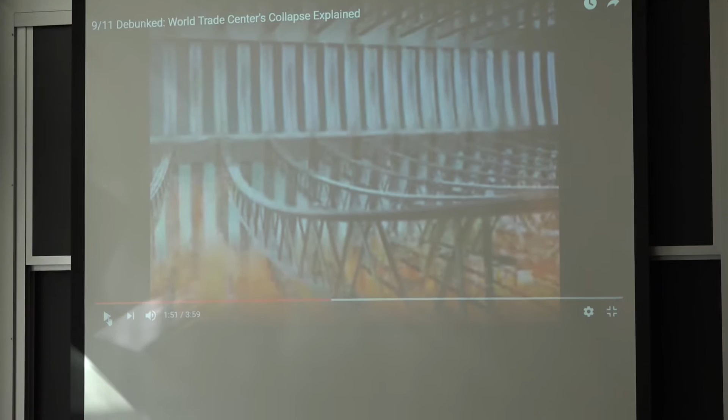So on 9/11, all the fuel from the plane was heating up these joists that made the floor. These are joists, they have concrete on them - we don't see the concrete, but you can see it bow. What happens is you have the two vertical columns on each side of the building, and then what used to be your floor - a joist with all the webbing you need for structural efficiency - became more like a rope with a lot of hanging weight pulling on each side.

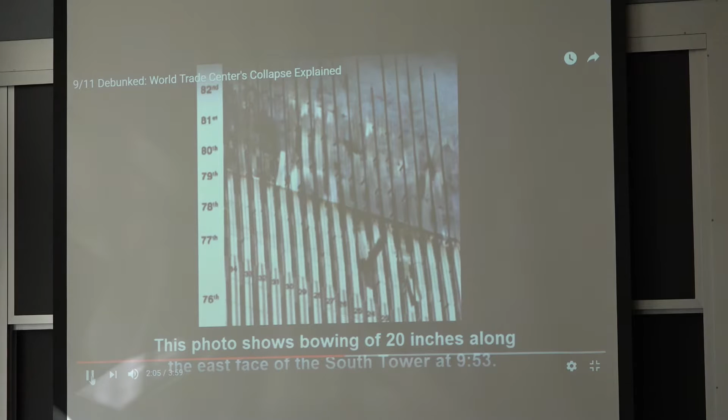So you can see over time it started to pull on the column, and there'll be a couple of images - this one I can't say we see super well, but let's keep going. You see it here: if you draw a straight line, you see there's at least one floor that caved in a lot before anything else happened. So when people come and say, well, the steel melted and became really soft, the true story is a little bit more specific.

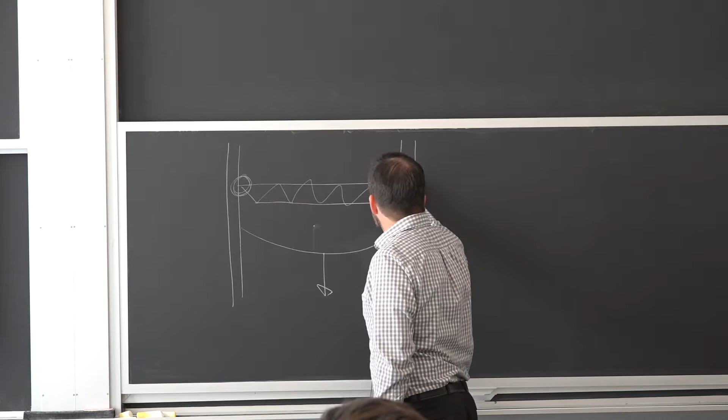There are so many ways that you could avoid this and delay by hours and hours, if not completely eliminate the collapse - if, for example, these connections just pull out and the floor goes down one floor. It's not great, but it's very different than the entire tower collapsing. So that was one alternative they thought of. The other alternative is, don't use structural steel there if you can avoid it - use a thin wall metal frame that can be subject to heat, or insulated.

So you have 2 or 3 options. And what it boils down to for a high-rise building like the Freedom Tower that replaced it is really thinking about what happened. If you have a lot of heat, it's going to happen again. We don't know when, but it will happen again. And there are ways around it that are practical.

It's engineering. It's not discovering a completely new physics or anything like that. It's not necessarily adding tremendous costs. It is forcing you to think, what am I going to do if this happened? The releasing of the joist, I believe, was really one of the things the engineer thought was a great idea, but there may be some other people that disagree, because then you need some more redundancy. You still need a frame to hold the building, and you have to insulate those in that case.

So the reason for using steel, and you'll see that with Professor Eagar, is the toughness. It is able to give before it breaks. So you need steel in that building, or some form of reinforcement, some form of toughness, so it doesn't all collapse if you have a seismic event. But that same steel, the softening of it and this pulling action is kind of what seems to be the consensus. That took a while, though. It took years for people to start agreeing and reviewing those images.

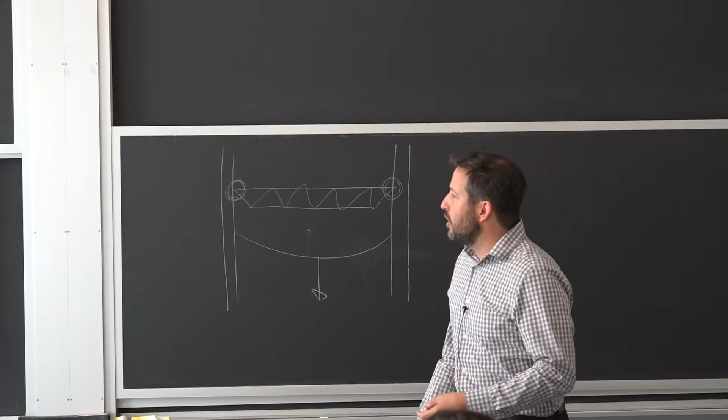So I cover a lot more failure analysis in the spring, but one aspect that I always bring up is look at everything you've got. You can go and think in your head, oh, I think this is what happened, or I think this is it, but the actual detailed photos here is what happened. So it caved in. How can you explain it? And to me, that does explain it.

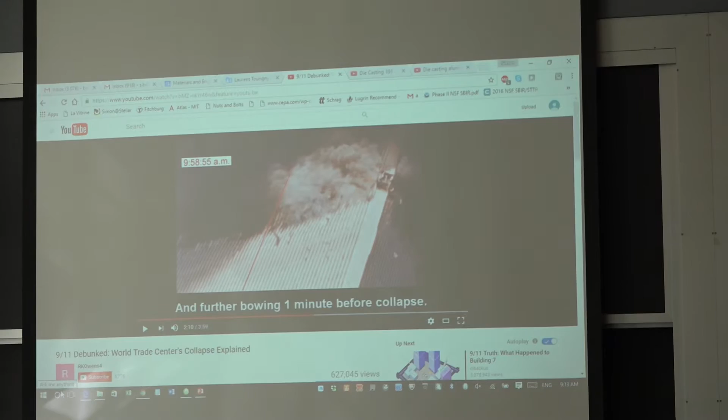So it is a big exercise. I think it's easy to do a failure analysis and miss something, to tell you the truth. So my only suggestion there, if you have a broken piece or anything that you're trying to know why it didn't work, is try to see all the information you have. And of course, there's some that's not going to help you, but you're supposed to be able to explain, whatever theory you got should be explaining those photos. Otherwise, you're still, I guess, on an earlier stage.

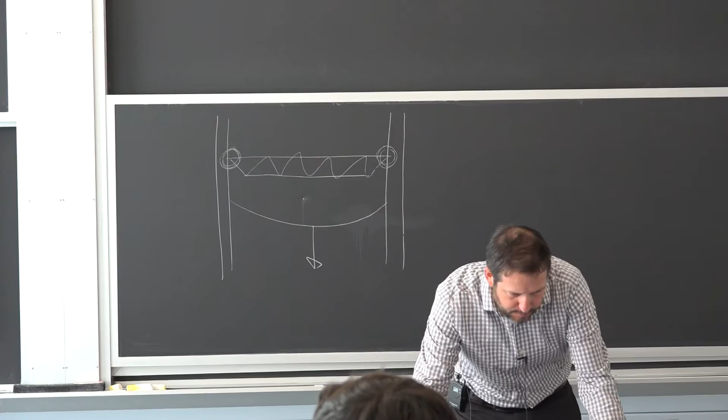So I hope it helps you when we go real fast through some examples and just point out, oh, here they forgot this, here they forgot that. There's just a lot of value in going backwards sometimes. Even any flooding, the event in Louisiana back a while ago, the flooding from Hurricane Katrina, there's just so much to learn on those levee, on the code, the safety requirements.

It's not the number, it's how you use it. If you say, I'm going to make this 30% stronger than it needs to, 30 sounds a little low. It's not a huge margin, but I guess it depends what you consider your worst case scenario, and then you can work from there.

There's something that I discussed also in the spring, in terms of just an airframe, the landing gear of an aircraft. If you talk to the aircraft engineer, he's going to tell you that he's got a 15% safety margin on that, as opposed to a factor of 2 that we design for a building. Traditionally, now there are new ways to design buildings that shave this down. But traditionally, it will look like you have more safety on the building, but it's because you don't do the same calculation.

If you design the landing gear, you do take the worst case scenario. You have all these readings from people landing in hard conditions, and you use that worst case load that you know about, and then you take your worst case material property that you know very, very well, because this material has been used thousands of times, exactly made the same way. And then when you combine the two, you can have a very small overlap, essentially a small spacing between strong enough, the demand and capacity, what we were talking about.

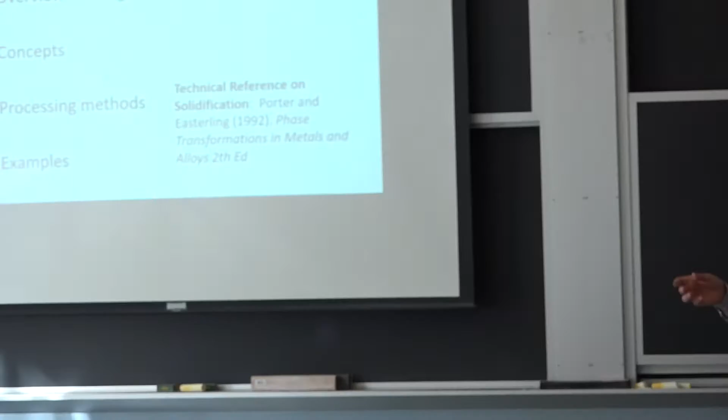And that ties in well with today, actually, because when you're at the point of making castings, a lot of the time you're starting to be in an optimization. And I'll qualify a few exceptions.

In course 3, we had a project for Tiffany, the jewelry people, where the platinum rings for engagement they make are relatively famous. One thing you don't want is these things to be loose or find out there was a problem with it if you paid top dollar. So for them, quality is very, very important. And they can make them very custom, and we'll go to exactly how to do that.

So that's one example where it's still a very small quantity—they can make unique rings through castings. But in general, for a structural application, let's say I got this chair, the first one I built, I'm not going to cast any components because that requires putting together a mold and a lot of processes. I'd rather just take raw material and assemble it together. So typically, if it's just a structural application, we are looking at high volume.

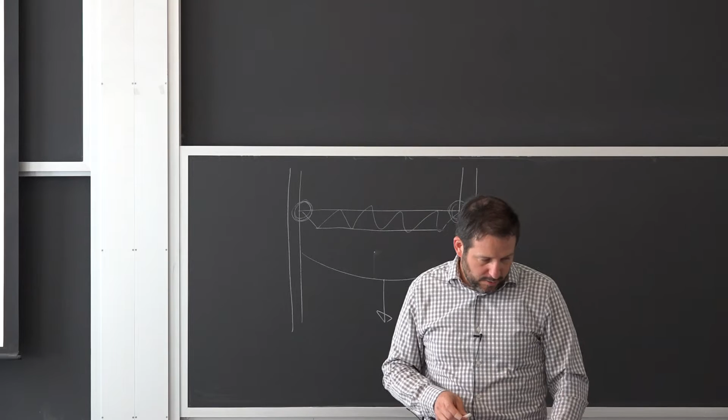So I'm going to give a few examples. We're going to talk about how we actually cast metals and what's involved when that happens. This is a really typical example—a lot of fittings used for plumbing are cast. The reason is you're looking at a complex geometry. It's empty internally, so if you're going to try to take a piece of steel and make a valve like this, you've got a big hole to make and a lot of other features that are really hard. So if you're okay to live with the reduced mechanical strength, then you go ahead and make a casting.

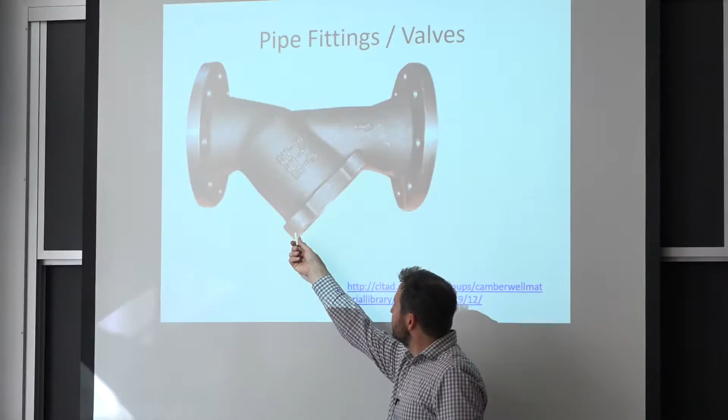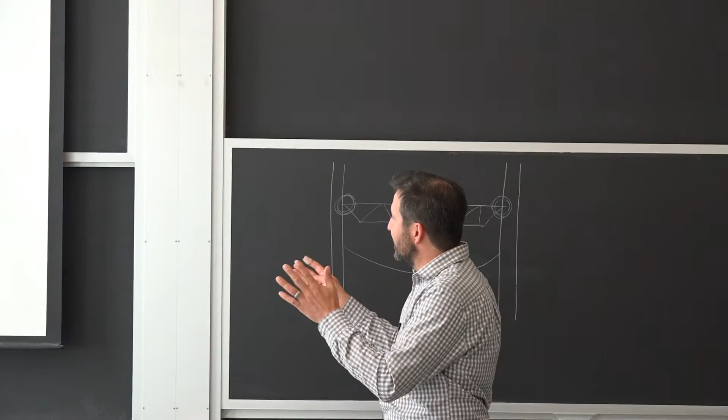Now, I do want to point out a few things. The first one is, see these lines here—this is something that was machined, and we talked about this last week. Here they machined for the bearing. So it's not because you cast that it's the final operation. It's relatively common that there's going to be a follow-up operation, in this case to get these flanges really nice looking. Sometimes if it's just a more simple piece of plumbing, they have to put threads, so they machine the threads, and that's how they get a really good fit.

I didn't bring the threaded component, but we do that because it's less energy, less costly than trying to start from a raw material that you work into this shape. If you could make this out of a forging—I circulated one last time—it's relatively complex, but there are so many operations of pressing in different directions to get there that it's not worth it.

Now, why am I saying be careful with mechanical properties? It has to do with how the metal solidifies. The example I gave last week was ice formation on a glass window, that it starts at one spot and then you have different looking crystals—these are water crystals going in different directions. You have the same with metal, and that may not be the best example.

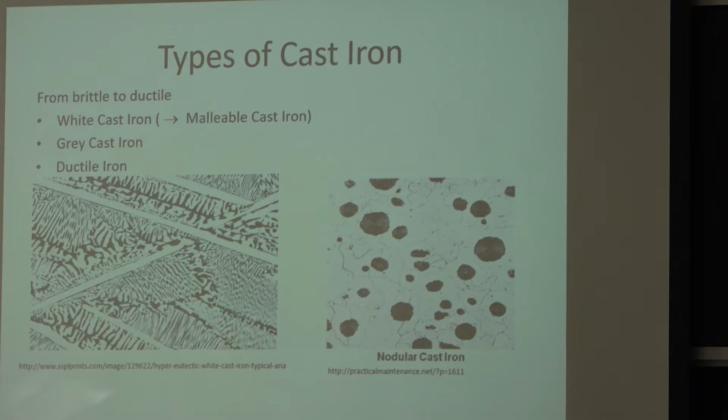We have better examples later. But the idea is, if you take something liquid and cool it off, some of the additions—for iron, it's the carbon—don't want to stay in the iron, so it tries to make its own separate phase or different kinds of phases. When you let that happen in the cooling process, it forms what we call dendrites, a very specific microstructure that's intermixed between soft and hard.

Are there ever times when you want a brittle metal? Very rare—the question was, do you want something brittle sometimes? One example that's been brought up to me a number of times is gray cast iron used for machinery. What happens there is, when you have these soft and hard zones, you can have kind of micro voids in it, and it's damping—it's absorbing some of the vibration as a result of this complex microstructure, but it's very rare.

It's a lot easier to think of the opposite process, where if we go back to that fitting, we want to do it by casting, but we also want to be tough. And there are processes for that.

The purpose of this slide is to show that through thermomechanical treatment and a special combination of chemistry, instead of having little lamella in the microstructure, you can get the hard parts being nodules in the microstructure, and that's how you get more ductility.

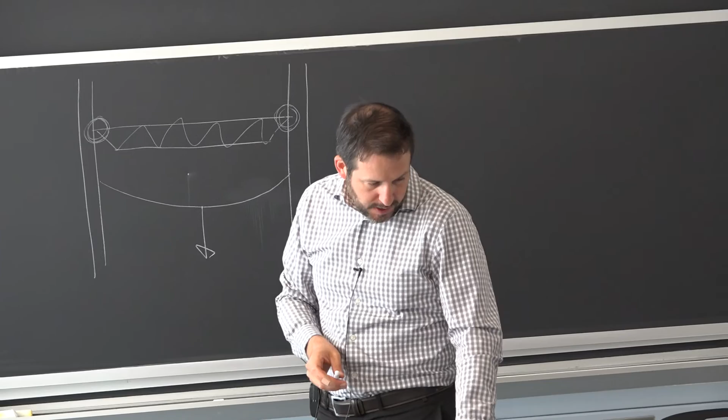So these big water pipes, for example, a lot of the time are made of ductile iron. It is cast iron made in a way that this brittle zone is in nodular form and is not going to impede the ductility.

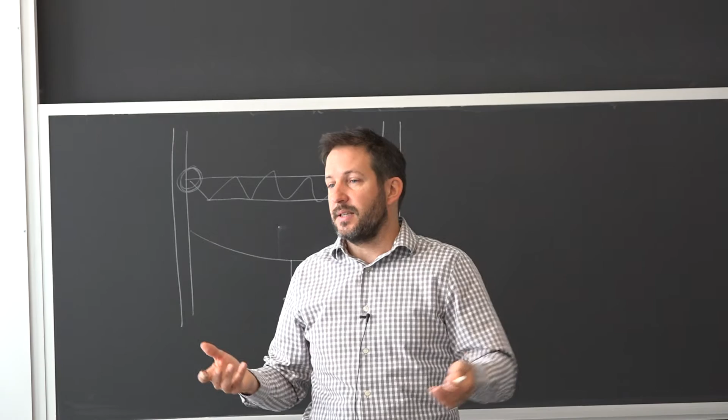It's a very high volume. We have a lot of big diameter water pipes at a lot of places. A lot of them are reinforced concrete because of cost, and Professor Eagar is going to go through that. But when you're at a water treatment facility with all these lines, making them out of cast iron is a standard way because it's very ductile. There's no risk of brittleness at this point, and you can have all these complex shapes with huge flanges to put the bolts and all that. So it's just a practical way of doing it.

If you were trying to take plates and machine all this and weld the pieces together, it'd be just very, very expensive. It's not that it can't be done, but it's just very, very expensive.

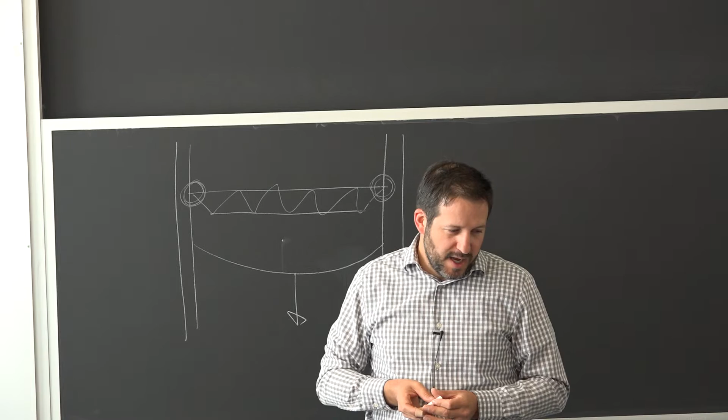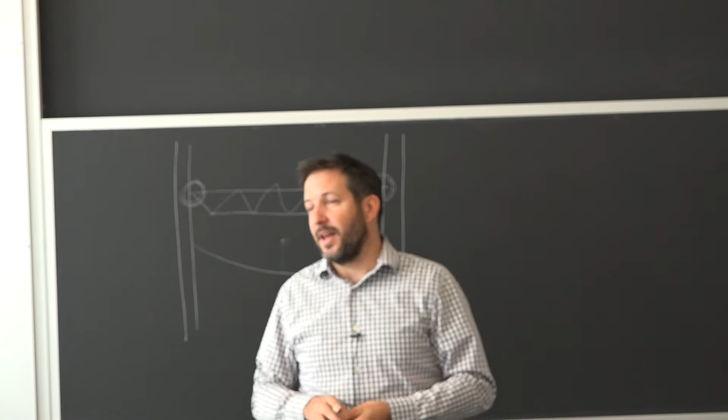There's a way that you make these, it's a centrifugal casting process. So you have your mold spinning and you pour in the liquid, and eventually it solidifies. You have to go through some heat treatment to get this nodular microstructure, and then you're good to go. But you got a big piece all made at once. So that's the big advantage.

Okay, so how does casting work?

If it fulfills the need for strength, ductility, and corrosion resistance, it's typically a low-cost alternative. You have to be able to make a lot of them, typically to cover all the expenses to set it up. It's involved almost always in making metals, from refining the ore to coming up with a product. Eventually you're like, okay, this is the chemistry I want. I'm going to solidify it and then try to do something with it.

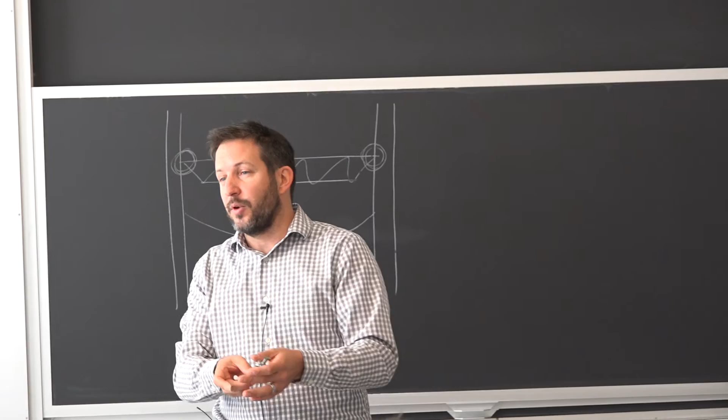So what happens when you cast, it's the end product, whereas in other situations you make these big billets, and we'll see some examples, and then you deform it until it's really homogeneous and really tough, good quality material, and then you make plates or bars, tubes, extrusions, different products with them. So most of the time, if it's a small quantity, you end up with a wrought product. They were cast, but when you look at them under the microscope, you don't see any of these special features that you would have with a casting.

I will be talking about polymer casting as well, because it's too easy for me to just go on about metals, and making the complementary comparison, I think, makes for good analogies for you guys.

Okay, these knuckles, they were making them by the 100 per year first and then 1,000 per year. It's a sand cast. It's the easiest process, if you will, to make castings in terms of the molding. It doesn't involve making a metal mold, which is very, very expensive to machine out of a hard material.

The place they use them, if you're interested, is where you connect to the wheel. So over here, you have these A-arms or control arms, and then you have this piece laying out that goes between the different arms, and the suspension goes like this. So the purpose of this is really to take the moment from the wheel and transfer it to the A-arms.

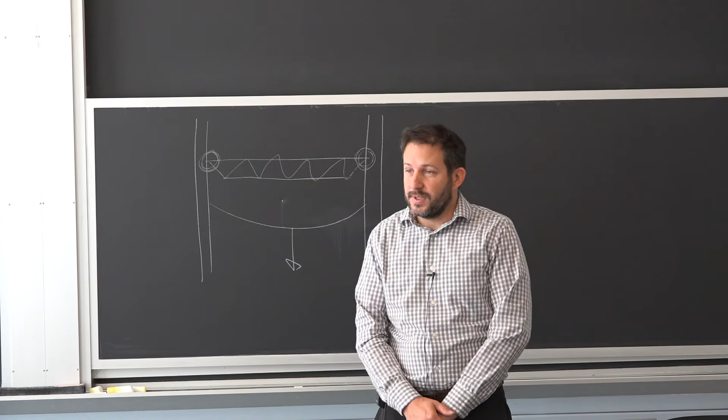But if you have the side load hitting the wheel itself, the rim, in a rollover situation, it turns out in some cases you could break this knuckle. It doesn't have anything to do with the initiation of the event, but it is another example of failure analysis. In this case, the manufacturer still decided to use something else because they didn't want to deal with all the back and forth about it.

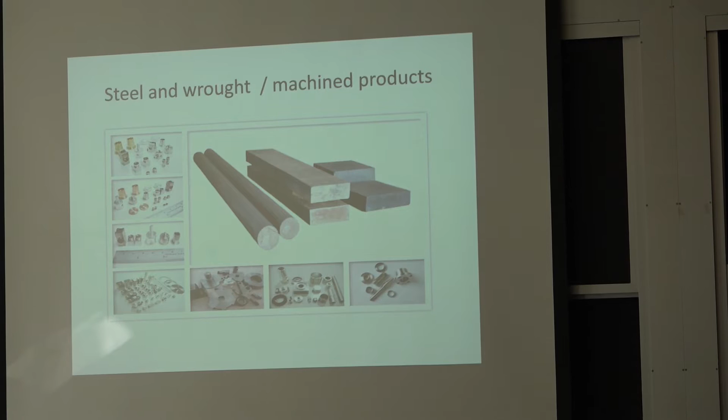So the alternative to making this complex shape all at once is to have these bars that you manufacture and assemble together, bolt together, and all that. It can get very, very complex. You can make a lot of very complex shapes, but it typically starts with a lot of steel.

Probably none of you have been to these mills, but it is very impressive. It's really, really hot. In a steel mill or rolling mill, you need the special safety hat, the clothes, and all that. If you're working close, you need very special gloves. At this point, it's around 1400 degrees centigrade.

What happens is you start vertical into this cavity, so I have a schematic of it. You have your liquid that gets into a mold vertically, because otherwise you can't do it as a continuous process. This mold gets cooled, so you start to solidify on the outside and then get to the center.

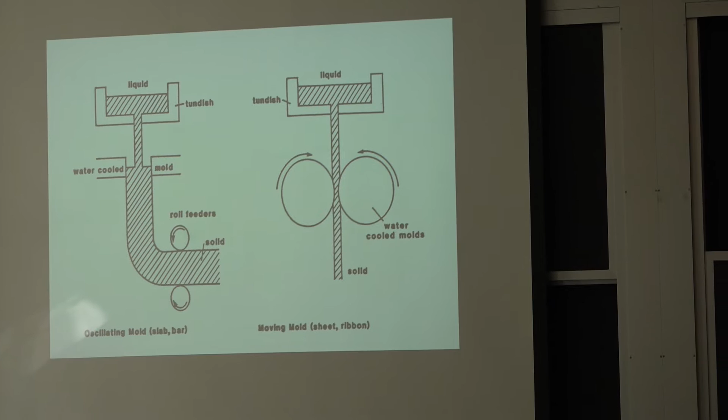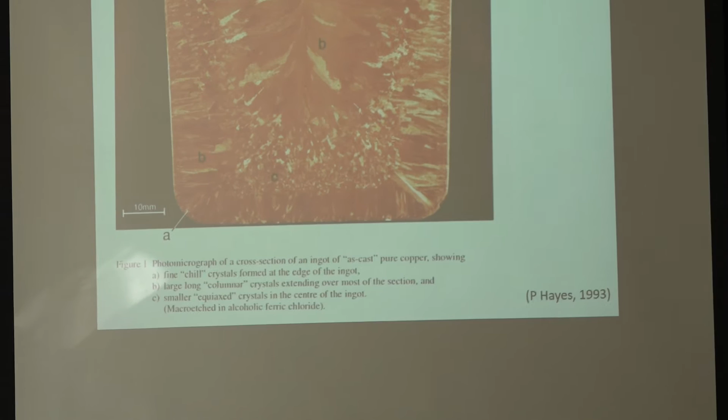So on a big part like this, an ingot, you see this chill zone. You have a very different microstructure on the surface, and as you get to the center, it goes through different stages - essentially your cooling rate is going down. There's also an effect where a lot of the alloying addition that you put in stays with the liquid. It's thermodynamic - they don't really like the solid as much, there's not as much room for them. So what we have is what we call chemical segregation.

It has a lot of implications, because when you're done with casting, this is what it looks like. There will be very few applications where that's okay. But in general, that really is the driver - it's the reason why you go through all this rolling, to avoid having all that segregation.

So it's not so much the fact that you can go to the hardware store and get a bar, that we don't use casting this much. Otherwise we would have a casting house. A little bit like right now at MIT, people are developing these metal printers, and it's a challenge. You can see some of the reasons why it could be a challenge to make a reliable part just by casting it.

But by understanding everything, it can be overcome. Traditionally, the reason why we use a wrought product is we need a certain toughness and homogeneity in the material, and a traditional casting process doesn't give it to you.

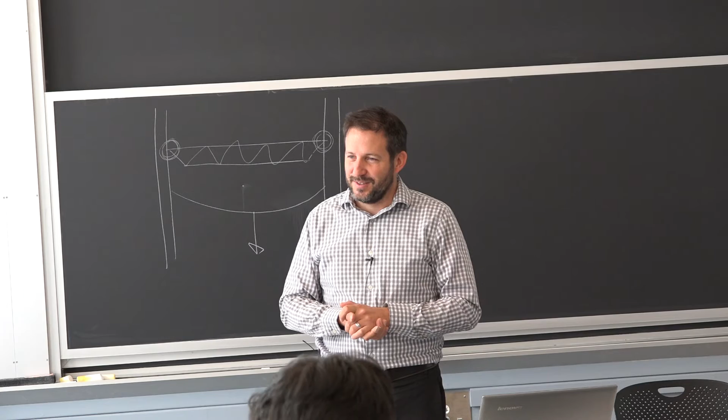So I'm really talking a lot today. Anything so far? Anything not clear, boring? Yes, I have a question about this - how big are those?

It depends. So if you're going to make, let's say, suspension components, like the big torsional springs or these leaf springs, you could start by about 10 inches by 10 inches in this continuous casting process, and then take it down to that bar size.

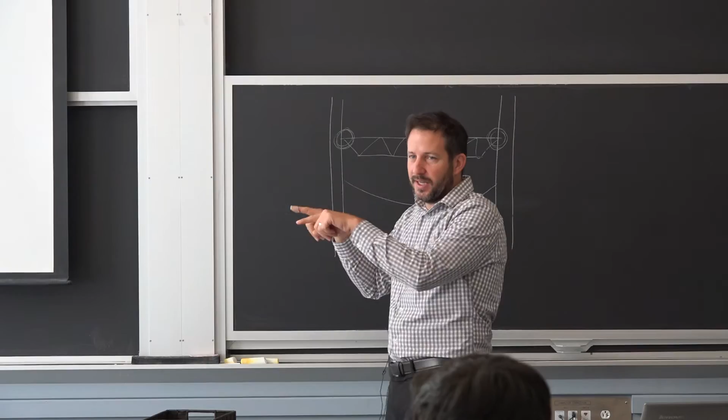If you're looking at making a big plate, a lot of times it's a bloom and it's bigger to begin with. It's a very good question, because one thing I realized I put on here is some of the development, especially for aluminum - if you're going to make aluminum foil, you don't really want to start with something that's this big. So they developed a strip caster process. Here you have two wheels spinning, so you can start with something that is thinner, a lot thinner.

It's just part of this continuous improvement. It's still the same process, but it does allow you to vary. I think you can start with less than an inch on the aluminum as the most typical way of doing it, as opposed to being this big. But doing it big is still common for big pipes and large beams. But it's got to take forever to cool down, right?

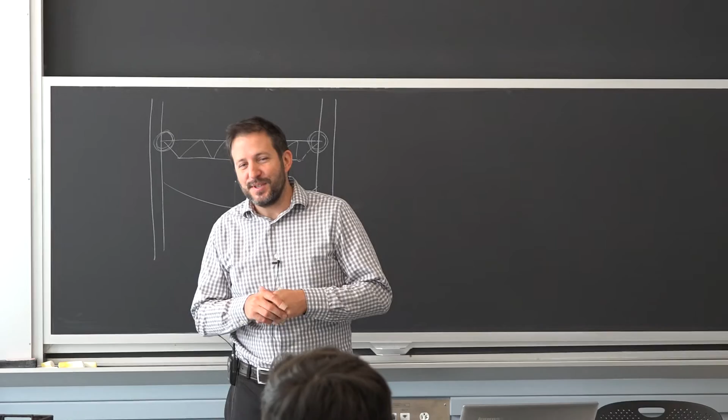About the cooling of the steel, a lot of times it's almost desired. If you have a mill set up to cast, sometimes it will feed the hot product to the rolling mill that does the deformation processing, to break that down. We're kind of skipping a step, but essentially you don't necessarily want it to cool quickly—you want it to cool at the right rate so you can get more done.

About getting stuff done: because it's continuously casting, the pieces get piled up. There's a cooling bed where stuff gets lined up and then picked up. These are huge facilities where you do this. A lot of times people worry more about the time it's in the oven, because that's the expensive piece of equipment, as opposed to sitting out there, where they can just add more room if they need it.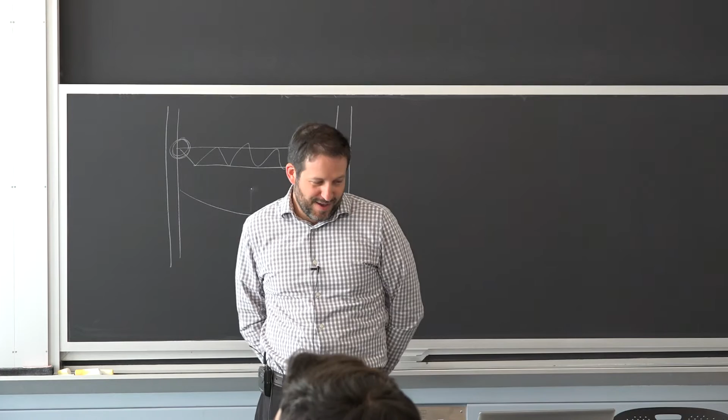Question: with the parts coming through, does that give you asymmetry in microstructure on one part? Very good question. At that point, going back to the schematic, it's just so hot that mechanically there's not a whole lot going on. And in terms of diffusion, the chemical diffusion doesn't really care about orientation—it's not affected by gravity. So there's not really an effect there.

There are a couple of really important things from our discussion about the time to cool and how hot it stays, given these are just in air. You have carbon in your steel and it's going to oxidize, so you lose some carbon on the surface just through that process. That's one reason why, if you can keep it really hot, you do—otherwise there's a certain amount, up to 1% of thickness on the surface, where your steel doesn't have all the alloying element it should have, and some of that stays permanently. When I was talking about oil and gas pipelines, it's a major issue—when we come with our equipment, we have to remove enough material to remove that decarburization layer.

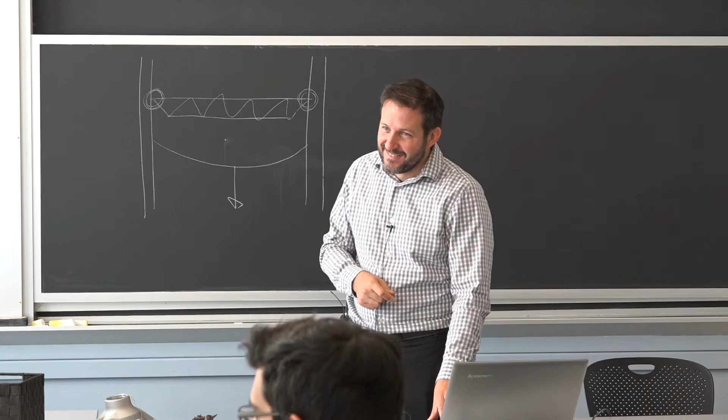Question: why don't they do it in a vacuum? About casting in a vacuum—it is done for certain special applications. Let's say you're going to cast titanium, you'll do that in a vacuum a lot of times. There are some aluminum processes that require it too, but the main reason for trying to avoid it when you can is cost. Before going to vacuum, a lot of times you'll have a shielding gas atmosphere—you put it in nitrogen or argon, which is less expensive. It's just about putting on the pressure.

One thing to add about vacuum: sometimes you lose some of the alloying elements, the low-weight ones that go into the vacuum. So there are some pitfalls, but you don't get oxidation—so you have something that helps you too.

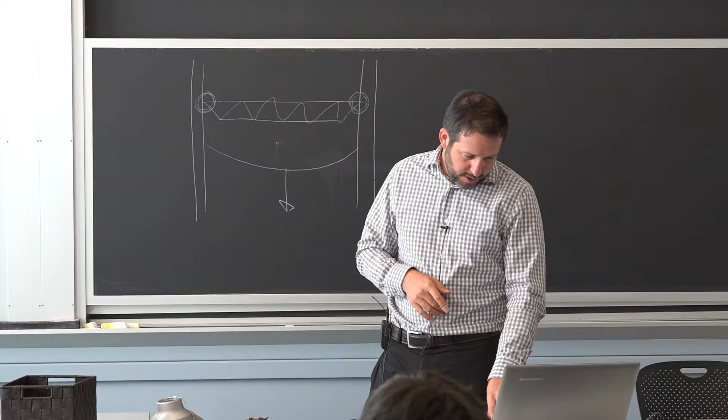So we talked about really why we're doing castings. Now we're going to go a little deeper into the thermodynamics—don't get too worried about it. I'll use this so we don't spend too much time drawing: this is the iron-carbon phase diagram. Iron is here, carbon is there, but it only goes up to 7% carbon. Traditionally, if you talked to a metallurgist—probably your grandparents—they'd say that in the entire 3 or 4 years of undergrad learning metallurgy, this was the most important thing, the thing they could summarize their thesis on. Now we're in a different world, so I'm not going to hold you to remember all of this, but the main significance, if you understand it a little bit, is that it puts things in perspective.

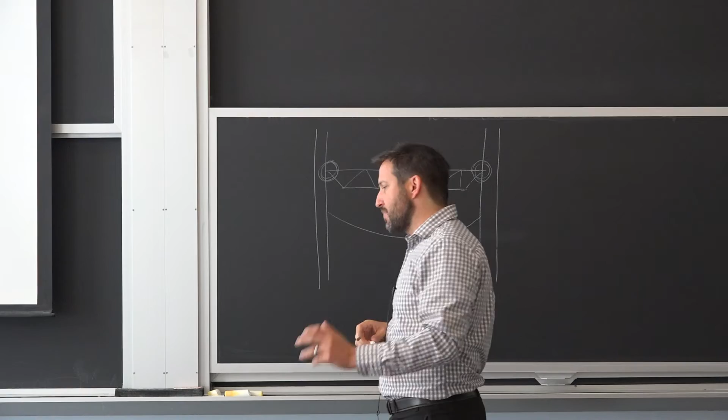What's so different between iron, steel, and cast iron? They all seem boring, but they are very, very important—we use a lot of this. Professor Eagar is going to go through this. This is a very high-volume business once you pass the stage of concrete, aggregate, and sand—when you start talking about metals, this is where you start. Pure iron is soft, very soft. And when you mix it with carbon, a lot of things happen. At high temperature, you'll see the word liquid there.

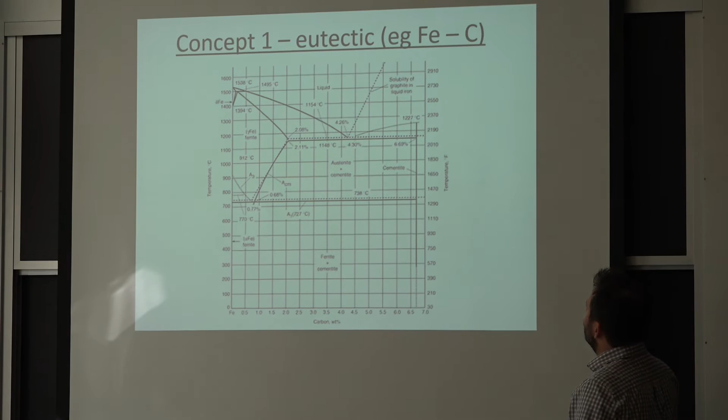They like each other, the carbon just goes around and it looks like water. When you start cooling down, the melting point of carbon is a lot higher than iron. The two of them together, you can keep them liquid to a lower temperature. That's awesome, because the first thing you want to do if you're going to cast something is heat up as little as you possibly can.

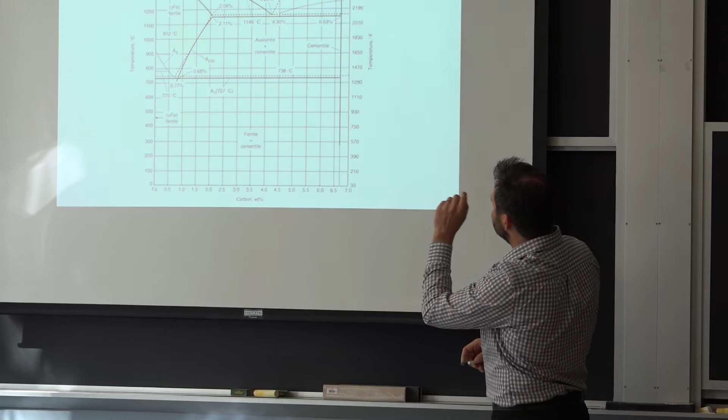This is really, really hot. So why, very long ago, in the 1600s, 1700s, 1800s, cast iron was so dominant in making cooking pans and stoves? Guess what, they couldn't melt it without killing themselves. So the combination of adding carbon to the iron lowers the melting point. If you go all the way to the left, it's 1550 or so, and adding carbon takes it down to below 1200.

It looks like nothing, but when you talk about this kind of temperature, the problem always is, what are you going to put it in? If you try to heat up, a lot of times it's refractory, things that crack and don't like thermal shocks, it's very hard. That was the biggest challenge in our work with Tiffany, where do you put the platinum to make the thing? Everything is very difficult because we're dealing with high temperatures. So being able to lower the temperature is the primary reason we use cast iron for casting.

Over the past 20 years, you can have more and more cast steel. If we go back to buildings, there'll be some junction points, very complex brackets that have to help in case of a seismic event, just to make the frame ductile. Some of those can be manufactured today by casting steel. You don't get essentially this brittle phase that we talked about with cast iron, but these are processes that operate at much higher temperatures, so it's a lot more expensive.

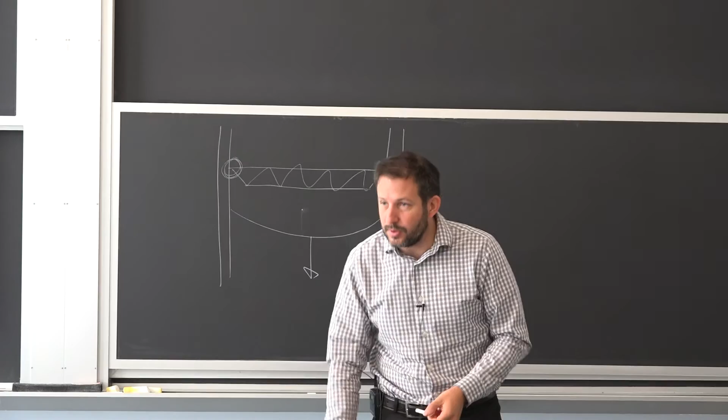You can do anything you want, it's just a matter of the cost associated with it. So pure iron is not used a lot. When we talk about steel, we're not in this high carbon zone. The high carbon zone, we just killed it. Cast iron is inexpensive, it's great to do.

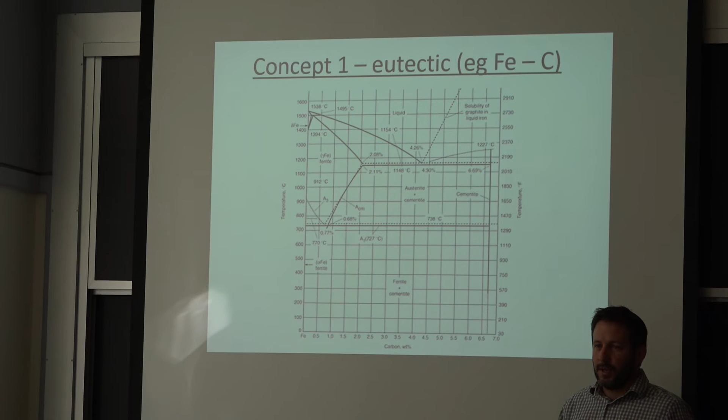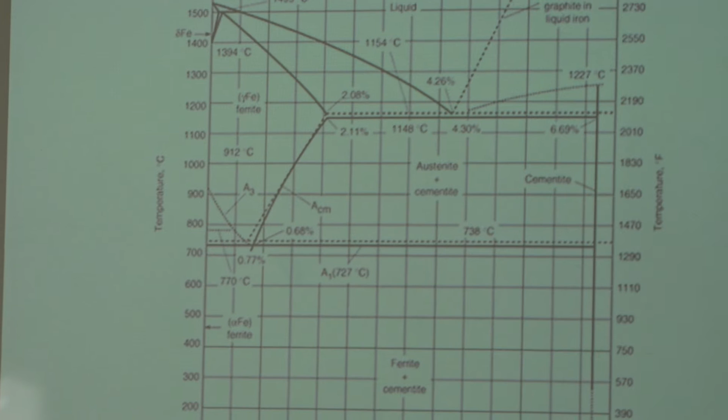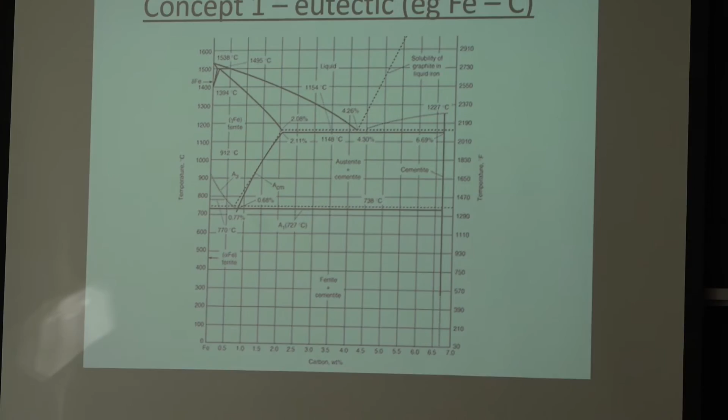If you're willing to spend a little more money and go through these manufacturing processes like continuous casting, it's great because then you get some benefit of the carbon in strengthening. That's really the main thing it does: it increases your yield strength, it increases your toughness, so you can reduce the weight of anything you build. There's been growing improvement over the past 20, 30 years, adding a little of this, a little of that. So the car frame is much lighter than it used to be because of these special developments, adding more than just carbon, and you get a good combination of strength and ductility.

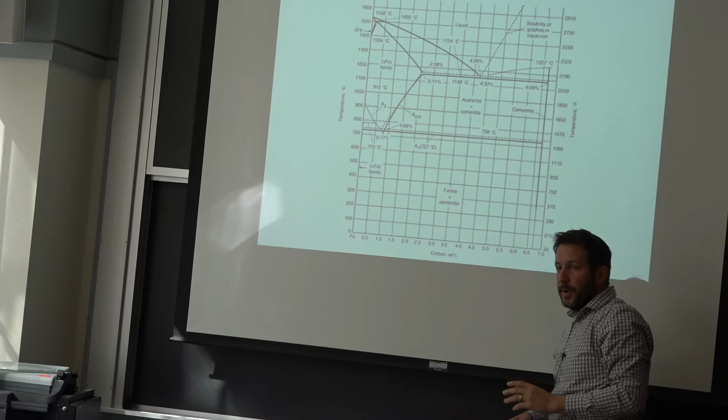We'll talk about some of that in heat treatment, but what I want you to keep in mind is we have these two zones. One here goes from the liquid to the solid, and that's about it. You go through these processes to try not to have a big lamellar structure that's brittle. If you want real high strength and a wrought product, you will cast the steel and then go through a lot of thermomechanical treatment.

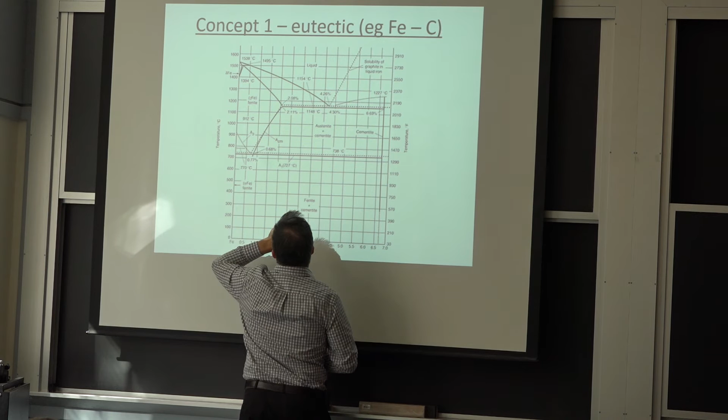So maybe the last part, if you'll bear with me on the phase diagram, we have this solid phase here that's called austenite. That's the red steel. And there is a eutectoid transformation from one solid to two other solids here. That is really where a lot of the action goes on. So when we talked in the first class, I said you're going to quench it and then you have to temper it. That was really all associated with how you make that transformation from the red steel to the other one.

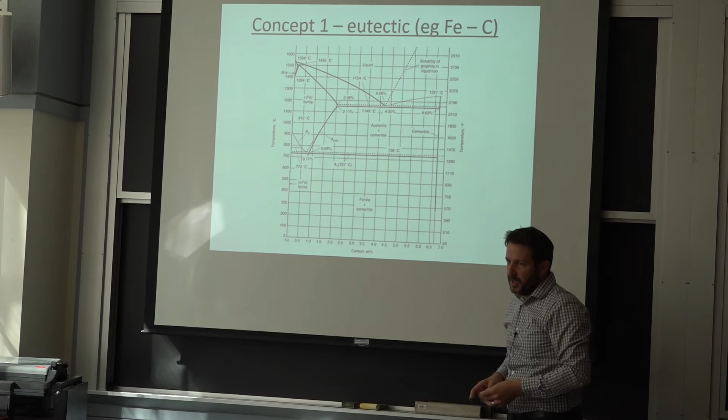If you quench, you avoid the decomposition into the iron and the carbon-rich phase. But there is a transformation in this particular case with steel. It's so unstable that it becomes a tetragonal structure. It goes from cubic to tetragonal as it's trying to accommodate that carbon in there.

So if you start, and we didn't bring these, but you just start like this. It's a cube, face-centered cubic to begin with. So you have one here, you have one on top, you have one right here, one in the back, right there, and one at the bottom.

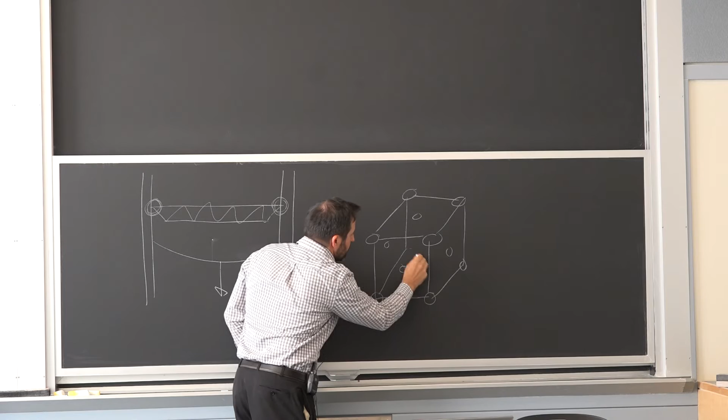What happens is carbon can go freely in there in this high temperature range when the steel is hot. Then you get to a point where the steel is no longer stable in this phase. It's trying to become body-centered cubic, but there's not enough room for the carbon, so it stretches in one direction to accommodate the carbon. We call it a military transformation. It happens really, really fast, and that's the martensite. Because it's tetragonal, it's not ductile. So that's a way you remember that quenching steel can cause you some trouble.

So you heat it back up, and then it goes back to these equilibrium phases. Depending on temperature, you get it real good, or you get it not so good.

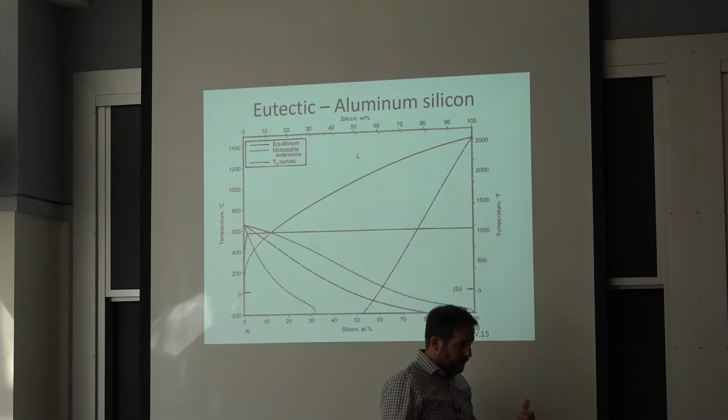All right, aluminum, maybe I should have started there because it's a lot easier. This is a phase diagram of aluminum and silicon. Same story where the silicon has a much higher melting point. The two of them together reduce the melting point. This may not look significant to you, but traditionally, and even today, adding silicon to aluminum is the first thing you do when you know you're going to be casting it. And there's more than one reason.

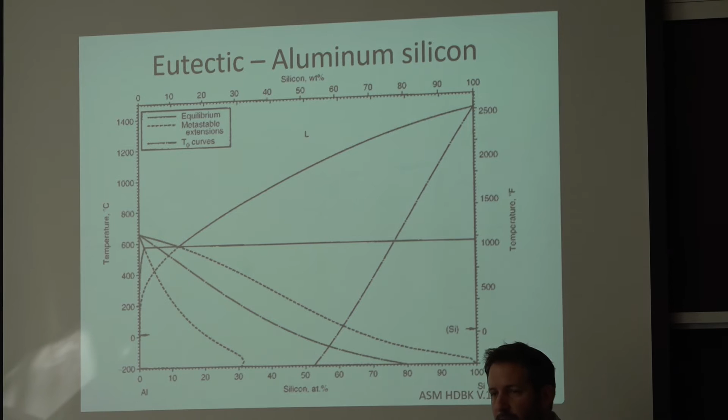Let's think about this. When you go to this eutectic point where you're going to combine and start making two phases as you solidify, if you know you're making two phases, it's going to make a two-phase structure right off the bat, as opposed to making these big, huge crystals that can take over all the way from one side to the other. So it breaks down, your cast structure is finer than it would have been if it was a pure metal. And if you're not going to deform it after the fact, that's what you want. You want something that right off the bat after casting isn't so intricate, like big fingers interlaced just waiting to spread apart. If it's already blended into a fine structure, that's how we use a lot of the castings. So the majority of castings are alloys for that reason.

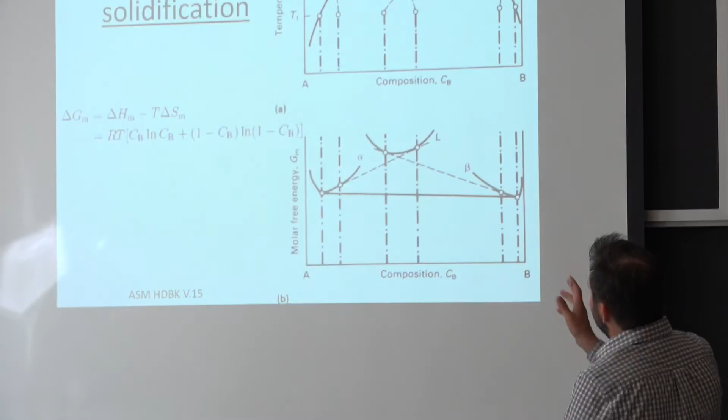So what happens? We talked a little bit about this. This is probably the most complex—definitely the most complex—we're going to go today. It explains a little bit how you arrive at a phase diagram.

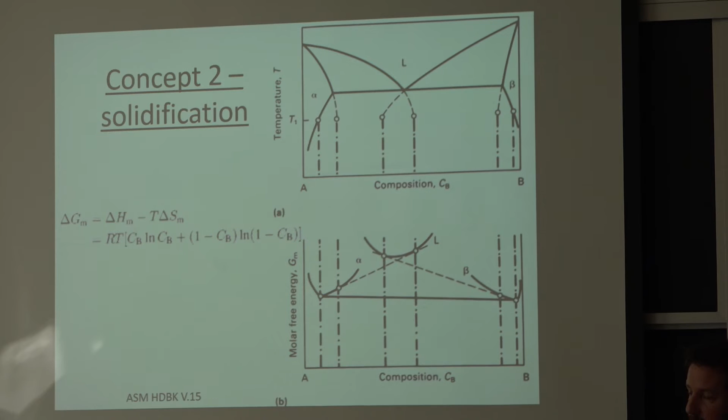If we go to the lower portion here, that's the energy of each phase as a function of composition. We have different curves: one solid rich in A, let's say it's aluminum, then the liquid, and then another solid. This explains why you combine phases. If you have this composition and just make one phase, it's going to be very high energy. If you make this other one, also high energy. So the way you minimize your energy is by having these two phases. That's how thermodynamically it's favorable to separate. These separation points, where you draw the straight tangent lines, represent the lowest energy. So you have a little bit of this and a little bit of that, so your average energy is right here, as opposed to being way, way up there. That's just how it works.

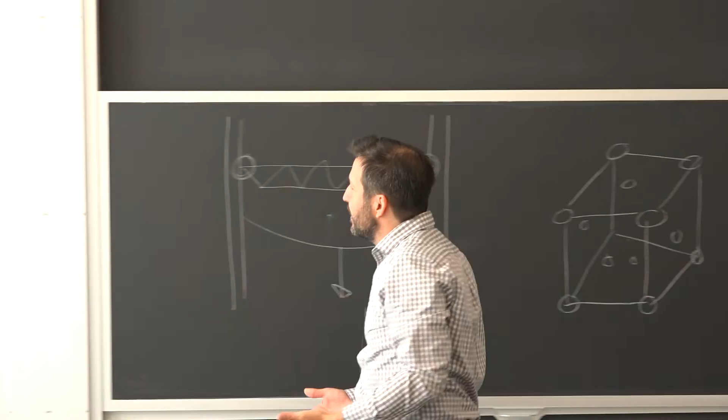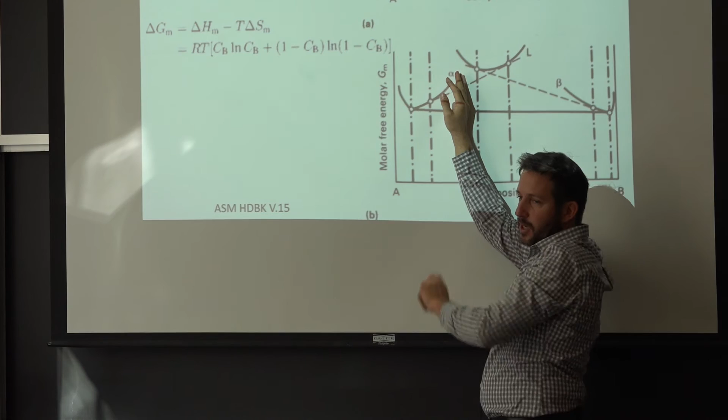What does it mean for us? It means typically that anything that is pure—let's say I'm here—is not going to want to be all in the liquid. There's so much energy in anything that's solidifying. So this is a solid and this is a liquid. Let's simplify this: this is our average composition, and I want to minimize the energy here. So what am I going to do? I'm going to make the solid with a small amount of addition in it, and then the liquid is going to become more and more rich in that same addition. That's the fundamental reason why we have chemical segregation. Everything that starts to solidify with metals is going to have less additions in it than the last bit to solidify. So what happens is it leads to these dendrites.

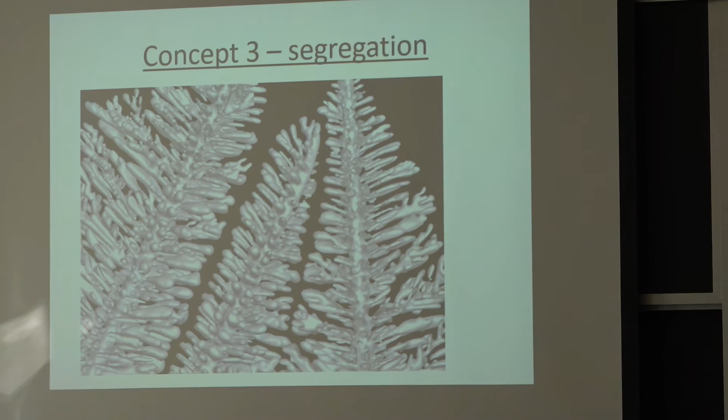Let's try to think about this. If I have a perturbation when I start to solidify—let's say it's perfectly straight, and then I go through a little bit of a perturbation—what happens here is this is my solid, and this is the same, but with a perturbation.

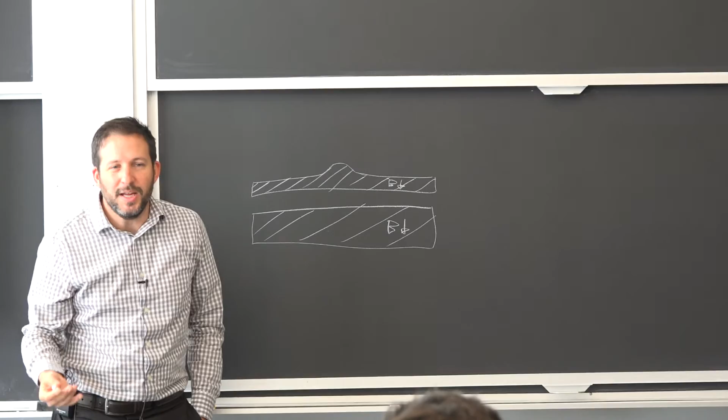This is low in B, so B is very low. But what it means is you keep pushing that alloying element into the liquid. So in these zones here, you just have more of B. That's not what you want. I know you want an A, but for here, we'll do a B+.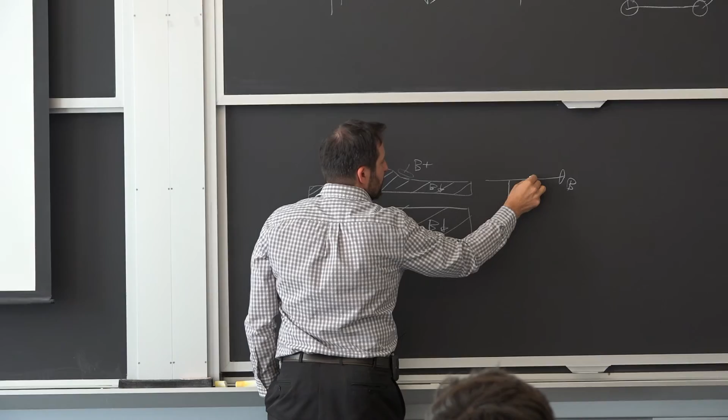You're not going to continue to grow at this location. What happens is when you have this protrusion, it's accessing... let's say I plot it this way: your concentration of B, this is B as a function of distance. It's very low in the solid, then it goes high, and then it goes back to this tangent equilibrium concentration here. So you try, by any way you could, to bypass your solidification front, and that's how you end up with dendrites.

You just try to peek right through this buildup of alloying element in front of you. There are ways, by cooling rates, that you can try to minimize that, but it's not easy. A lot of times casting faster helps you avoid some of these issues. It's just going to go, so you make more dendrites, they're all smaller, and life is better. I keep using the example of a crystal on the window, but I think it's really valid: if it's frost, it happens really quick, it's going to be all very fine. If it just started to cool really slowly, then it's different.

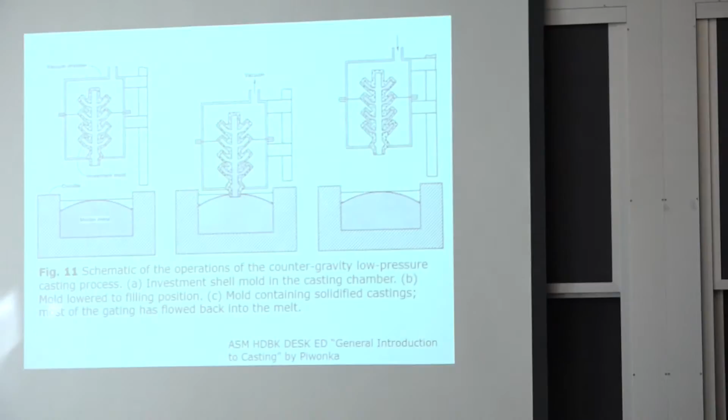All right, maybe this is where we'll have to stop with this whole casting business for today.

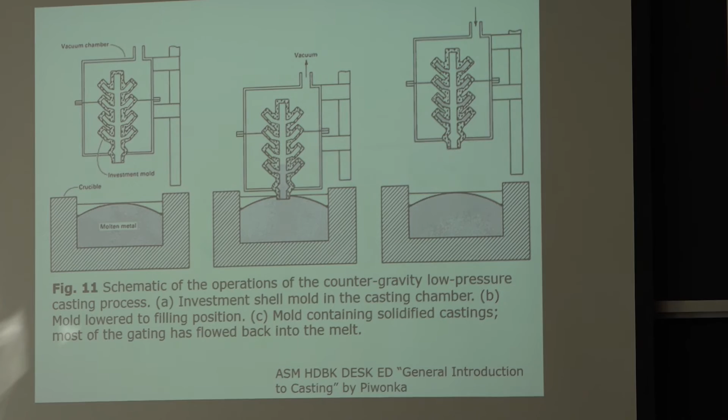We talked a little bit enough about making big pieces, so we're going to take the opposite end and making these rings. It's called investment casting. There's so many casting processes, that's what I should say first. The one that is the opposite of trying to take something big and lowering it down is you make a piece of wax of any shape you'd like, and you set it up as a tree shape.

So what happens here is you dump this in a slurry of what you want to use to make your shell, to make your mold. It's a low temperature process, essentially done by stages. You keep adding and adding, and you build up this shell around your wax. Then you melt it all out, the wax gets out, and you have this very intricate mold that you can use to cast anything you'd like, as many pieces at a time. So for jewelry, it's perfect.

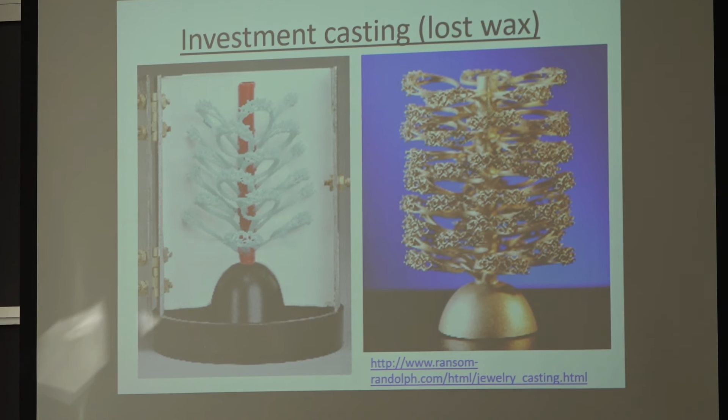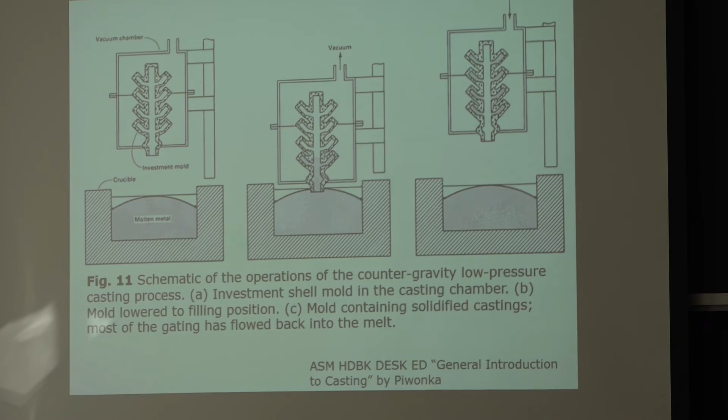You get to be so refined, and it doesn't take a lot of energy to make the shape you want out of wax. Then you get your mold done, and you pour the metal typically from up above. It's going to come here and go back up into it. That's a very, very typical process, and that's what we were sort of looking at here, where you have a mold and then you fill it in from the bottom up, and you hope for as little porosity as you can, and that depends if you're going to be in a vacuum, if you have a shielding gas, what metal you're casting, at which temperature.

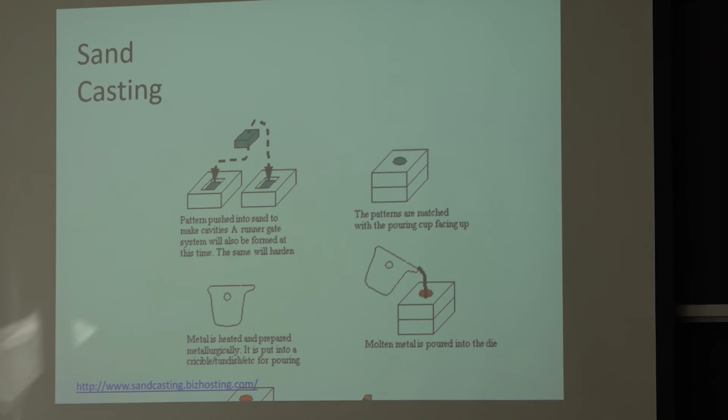So this is the small size. Then the sand cast, like this one here, is a little bit simpler, where what we have in bluish is the part that you're trying to make. So you make the impression in the sand with that part, and then you get that sand to consolidate. You have this treatment to make it a solid mold. You take your part out, and then you pour the liquid into that mold after you close it. So you typically have halves, I didn't say that when you make those sand casting processes.

So you only need to make one pattern in this case, and you can keep reusing it, but each time you do need to make a mold. So it can be, you can reuse some of these. I'm sorry, you can reuse them. It just depends exactly what you're trying to do.

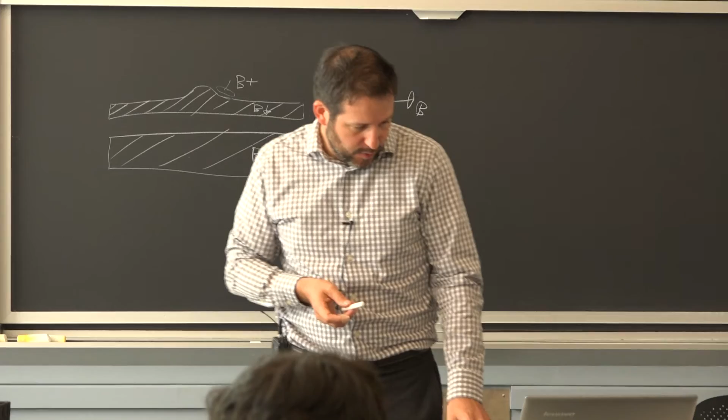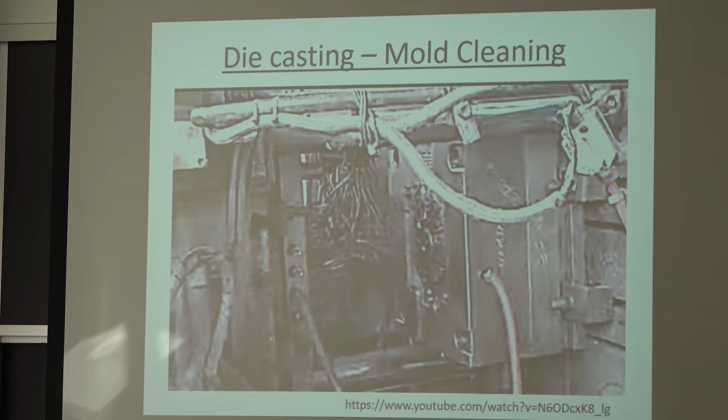The most common sort of high volume process involves essentially a metallic mold, especially if it's aluminum and you're trying to make aluminum wheels. You can use metallic molds and have this high cooling rate that gets your microstructure really, really fine. And that's probably where we're going to stop, just to show how fast these things can go.

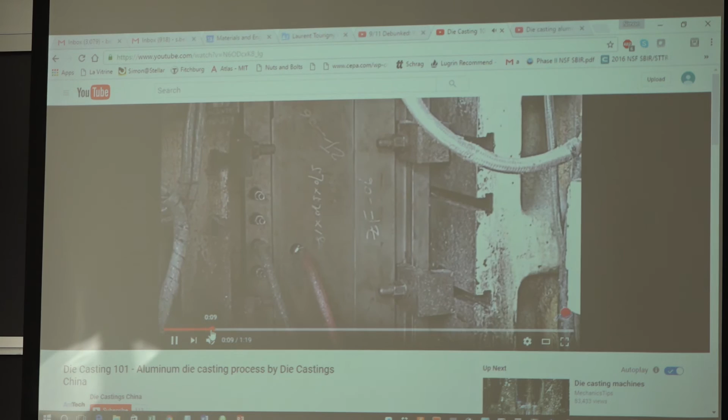I think it goes through a few cycles. So they close the mold, pour the liquid in from this big tank, and then after a couple minutes, reopen, and you have your part made. That's it.

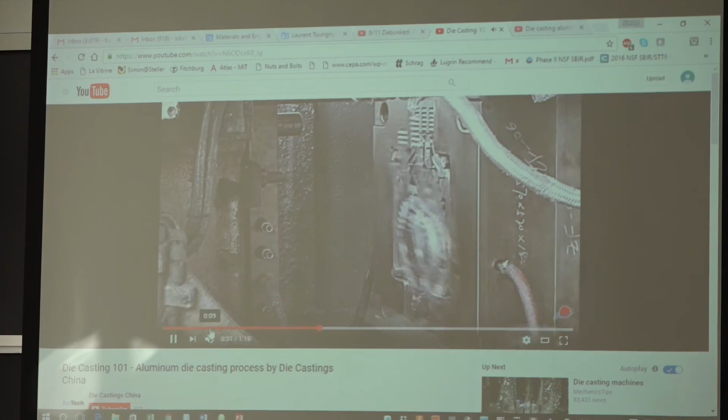There are a couple of things that happen, you do have to do some cooling and stuff. See here, they're just cleaning the mold to go to the next one. But it's all in air, and it happens fairly fast. Again, it's not just a question of efficiency that they have these metal molds, it's to be able to cool fast and have that fine microstructure. So it's very typical.

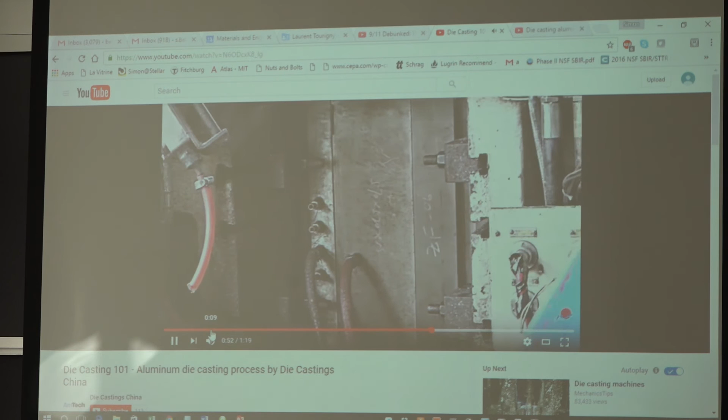It's the die casting process used to make, not this one, but when you have a much larger quantity. Getting this machine set up with the right cooling rate for everything you make is a big project. But it's useful. It allows you to literally almost print parts at that point.

So I'll take any other question you have, because I'm going to have a few more things to cover next time. Yes? For investment casting, so you have wax and you dip the wax into the metal?

No, you dip the wax just in a cold slurry of kind of like what's going to become your ceramic shell. So you have the wax, you build a ceramic shell around it, and then when you heat it up, you consolidate that ceramic, so it becomes a really hard mold, and then your wax just falls through it. Oh, I see. Yeah, and then you can. Yep, you get the metal, you set it up, and then you fill the metal into that shell. Oh, okay. Yeah, typically from the underside.

Okay. Yes. I know 3D printing is advancing. Do you think it'll ever replace casting? For some applications, for small parts, I do.

I'll bring, next time I'll bring you something that was laser sintered. When it's small, you can make a couple inches now. It's not that expensive. Even today, if you're looking for something really, really intricate, you can consider it. Big pipes, you know, why would we try?

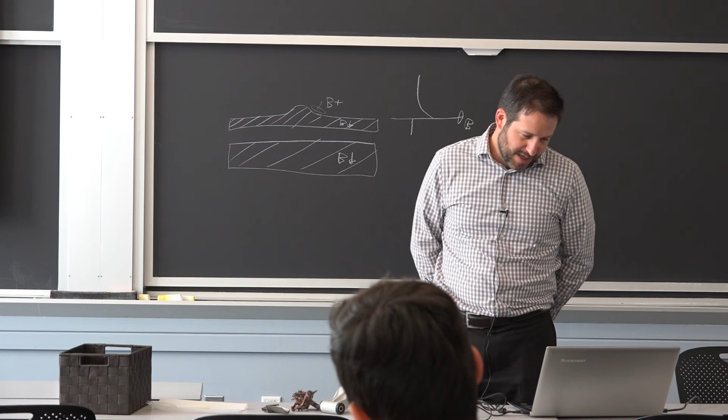Yes? For this video example, how do they make sure that the part stays on one side of the die, not the other? Well, I really don't know. I haven't really looked carefully at exactly what the sizes are. A lot of time it will stick on one side, and they have an extractor that's pushing it. Maybe in this one we see those extractors. So the side that's more intricate typically will dictate where the stuff stays and also where you supply it. You supply it from one side, so you got to break something there because it all got solidified. So by default, I think there's just going to be one side that's going to stay in because you have that supply coming in of the liquid.

It's very intricate. One thing you want to make sure is that it's not cooling too fast so you don't fill your mold. There's really a compromise. And there's a variation of this where your feedstock is a combination of liquid and solid, so you don't have as much shrinkage, and you make better parts if you're willing to go through that process of having a feedstock that already contains solids. You guys have a lot of good questions. Thank you so much.